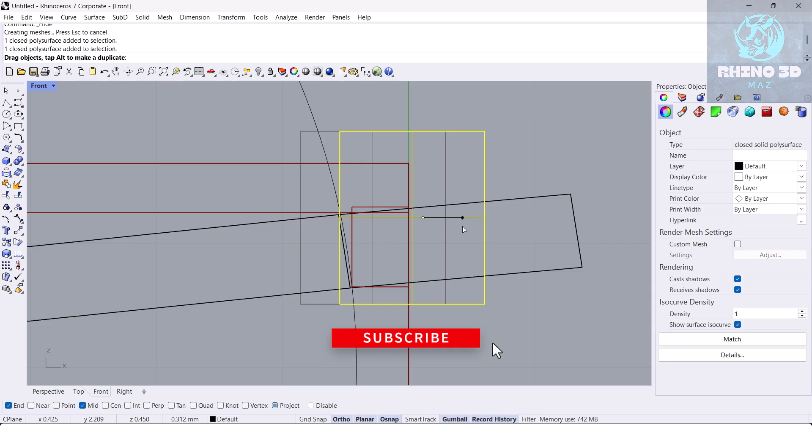So in this video, we are learning how to design a box lock in Rhino in the easiest way possible. The main thing that you should know is the height of the box. It depends on the thickness of the tongue and the thickness of the box. That's the main thing that you should know. The rest is very easy.

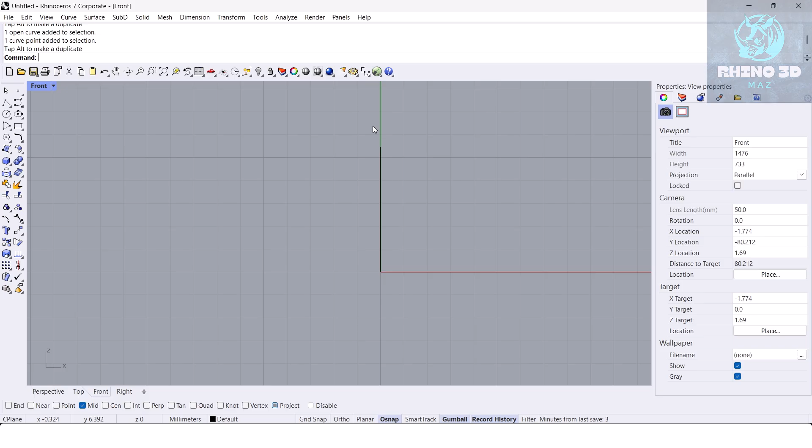So I start with drawing a line from center, it's just a random line. Then I start making a copy, or you can use offset, it doesn't matter. So we need at least 0.4 for the thickness of the box. This is the minimum I'm talking about. Of course, for some designs, you can increase it or decrease it, but I don't advise you to decrease it.

I just advise you to make it thicker. For example, maybe 0.5 or 0.6 mm is much more ideal. And then we have a tongue, which is like this.

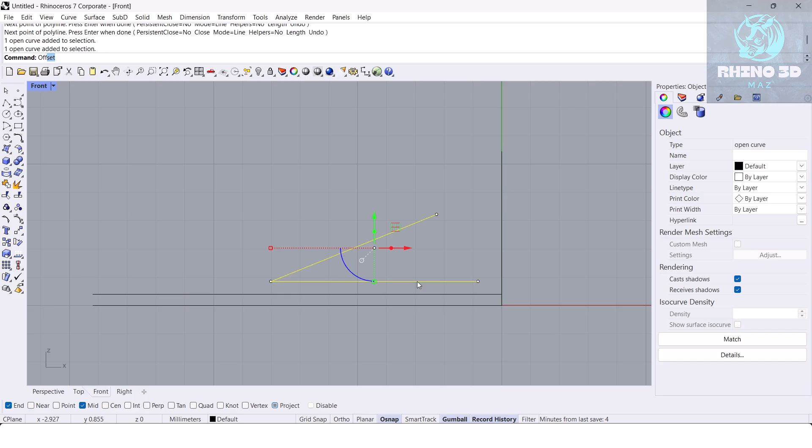And for the bottom and the top, if we offset, for example, 0.6, which in my opinion is the minimum. So we have 0.6 here, 0.6 here, so it means it's totally 1.2. Then another copy with 1.2.

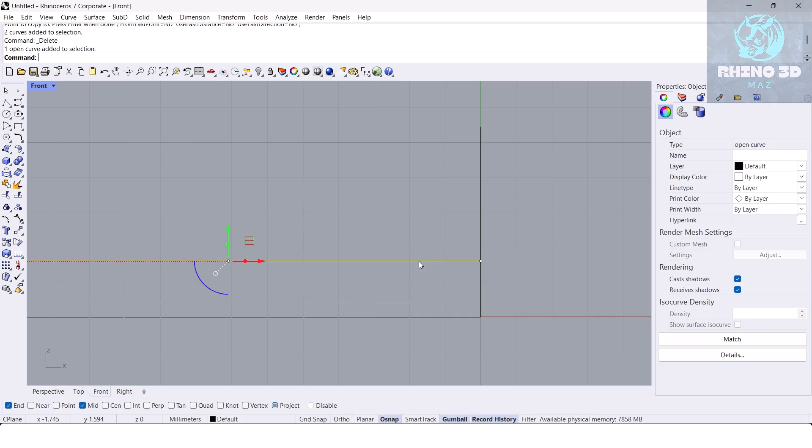Let me remove this curve. And then we have another 0.6, which makes a stop or something, which takes the lock inside to not go out. So we need at least 0.6 for there. So I make another copy with 0.6.

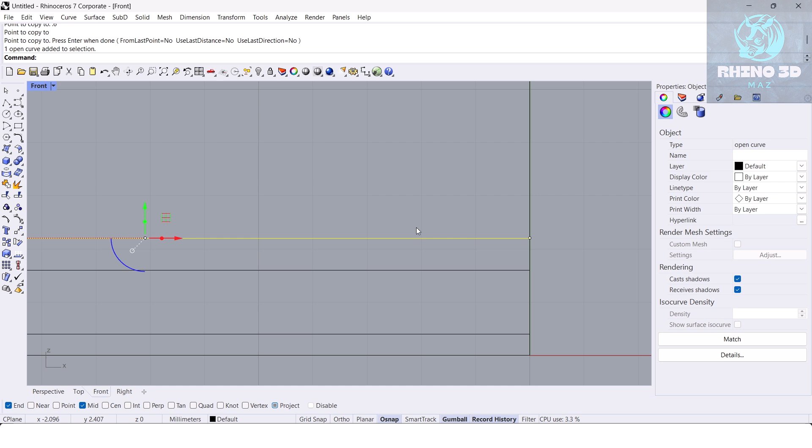And at the end, we have a thickness at the top of the box, so for that part also we'll add 0.4. Then the total height of our box will appear, which is 2.6.

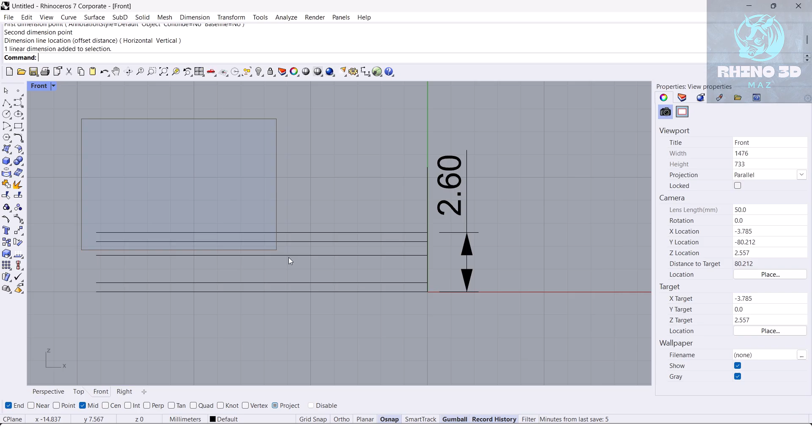We will add some tolerance to it, so I will make it 2.65. So I will draw a line with 2.65. It will be a minimum box, minimum height for our box lock.

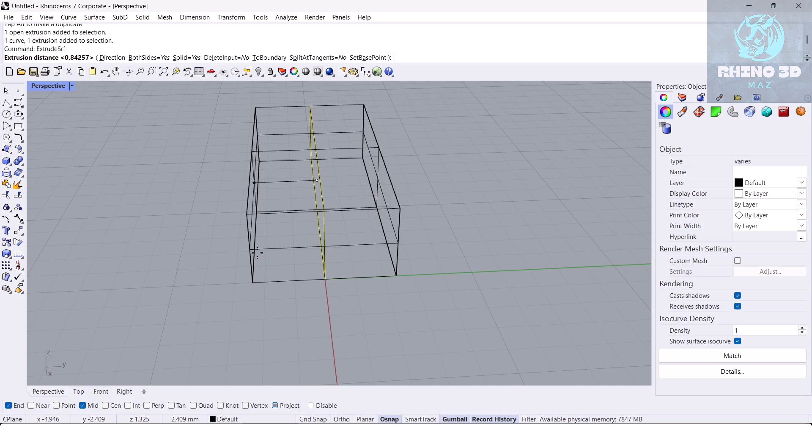Now I'm going to add the width. For the width, you have more flexibility, you can choose whatever you want. In this case, in both sides, I will push 3. It will be totally 6 mm width.

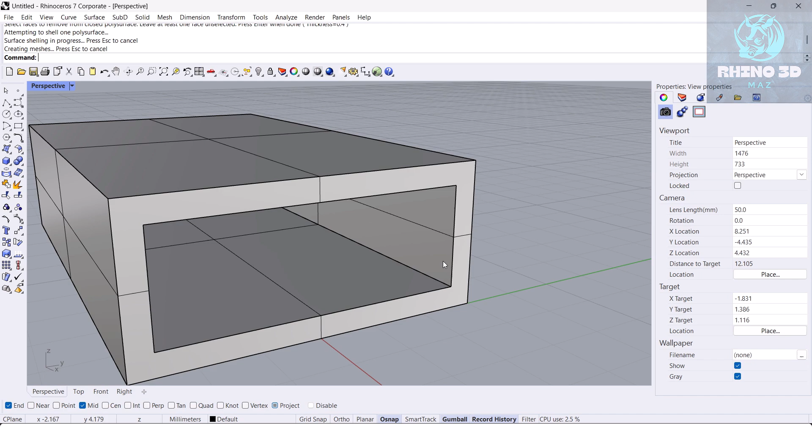Then I'm going to use shell to make it empty inside. Our thickness was 0.4, so now we have a box. In here, we have enough space to add our tongue.

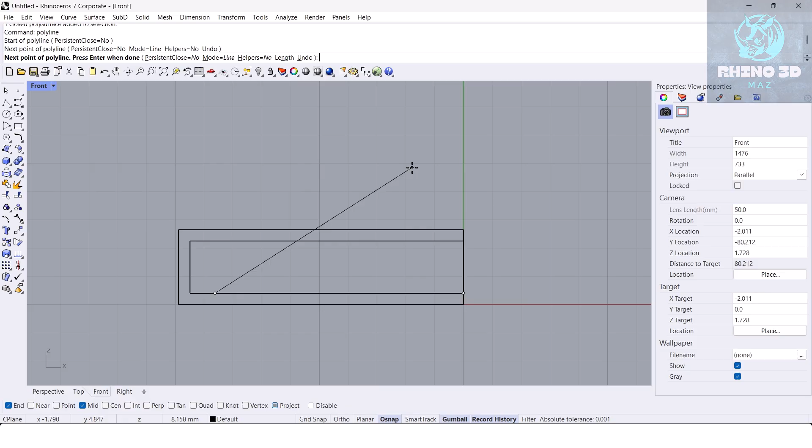Then I'm going to the front. I hide the ISO curves. The project on, I start designing the tongue. I need the end point here, if it will give me, yes, this is our end point. And draw a curve like this.

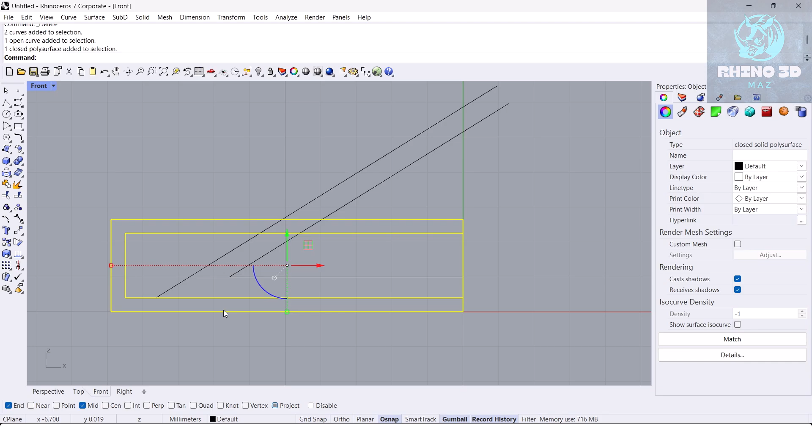For this part, many manufacturers like to make it manually after casting because of the spring effect, and of course, if you do that, it will give you a better result. But sometimes for mass production, we prefer to use the casting parts. Of course, after casting, you will have a better result if you make it by hand on the bench. But anyway, I'm going to show you how to make it.

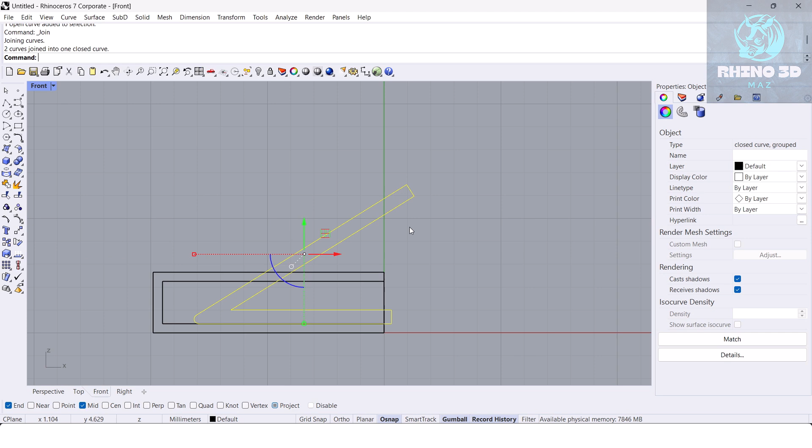Then we have a planar surface here. I just used fillet here.

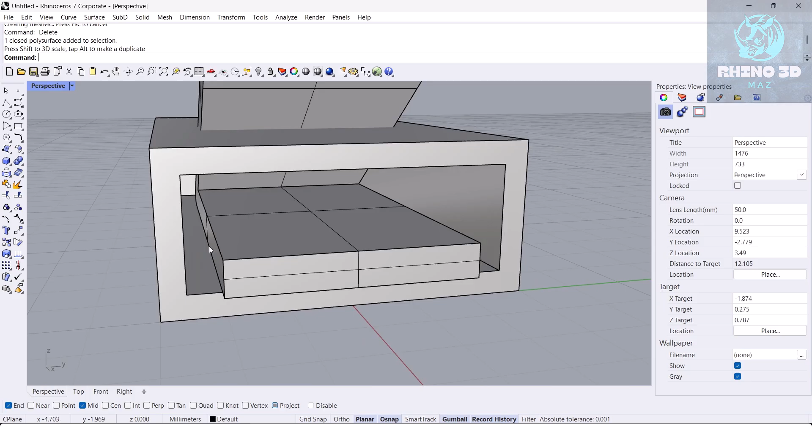Let's make a planar surface. What's the perspective? We need it with the same width of the box. You can decrease it, no problem, if you want to save some weight or do something else for whatever reason. If you want to make it smaller, the only thing you have to do is close the gap, and you will be fine. But in this case, we are going to keep it as the width of the box.

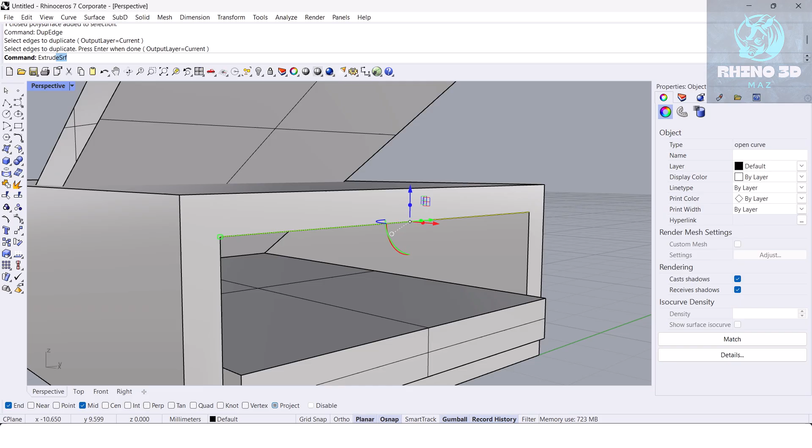Now we have to make a duplicate edge here, extrude this piece to the bottom, make the stop or the break, just make some overlaps and add thickness. The minimum will be 0.4, 0.5. I used 0.45. Let me add some colors to it.

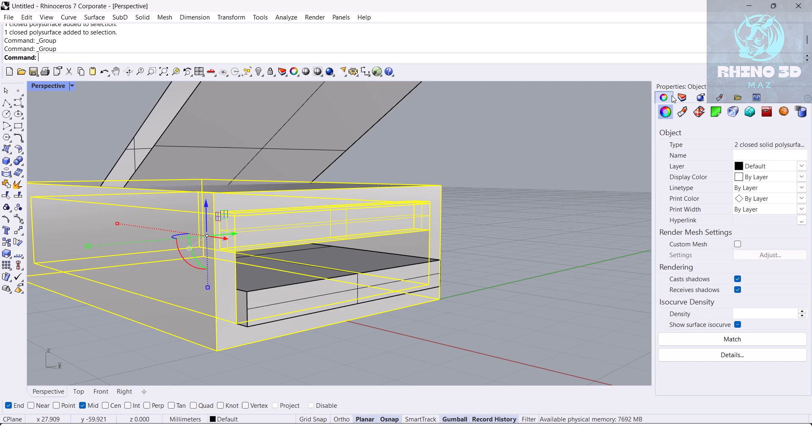Change the color, this is our box. Let me make it a little bit darker. Now I feel much better. I just hide the ISO curves so we don't see something wrong.

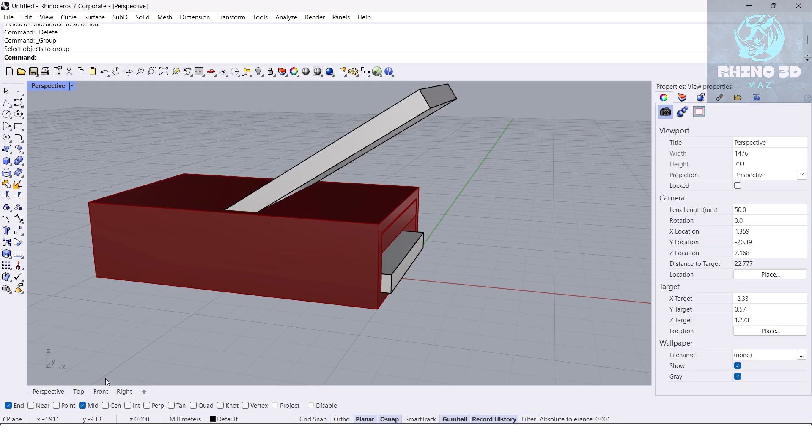The second thing that we need is to understand how much we have to cut through here. For example, I'll show you, I draw a both side line with the minimum 0.45, which gives us about 1 mm. If you go below these numbers, your lock will become broken and it will break easily.

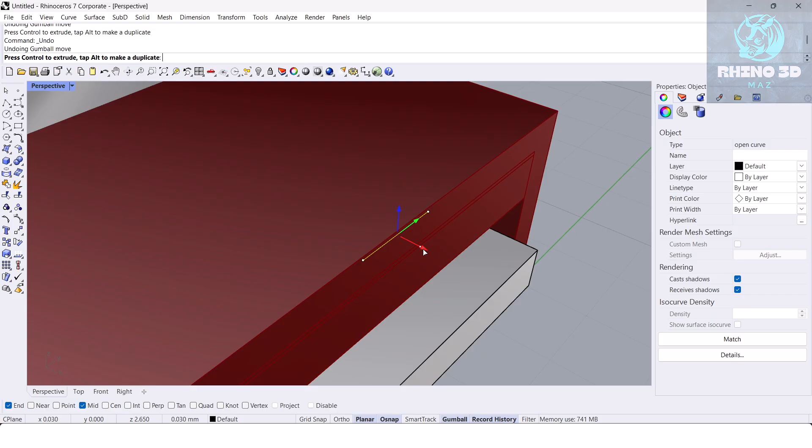Especially if you are using, for example, 18K or 21K golds. But if you use 14K or silver or whatever, it will be much stronger. But my numbers are the minimum, maybe you can go below those numbers, maybe you can go higher. It depends on you.

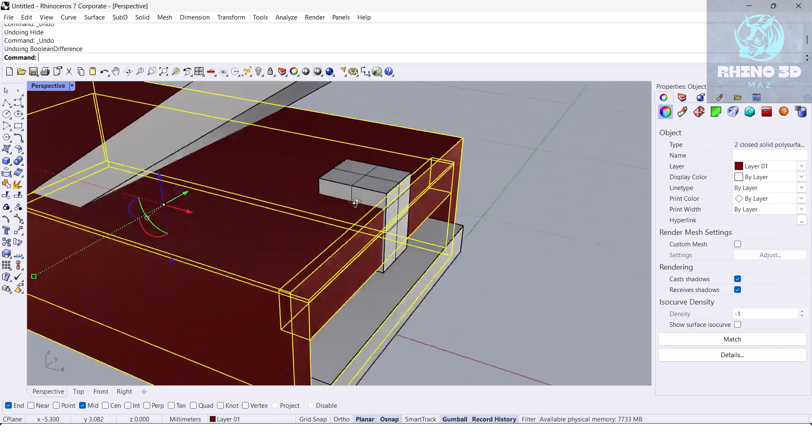You have to do some tests if you want to do that. Now we have to understand how we should open this part, with a Boolean difference - how much we need to go through, it's about the depth of the Boolean which we are doing here.

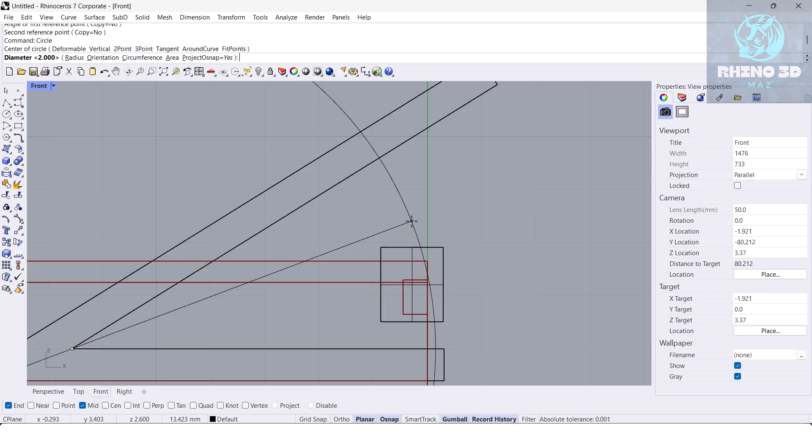To find that part, we're going in here. Here is the center of this one on the bottom. I add a circle and put it here. Let's check - our lock should become here and stay behind this part. The part which I'm talking about is this part.

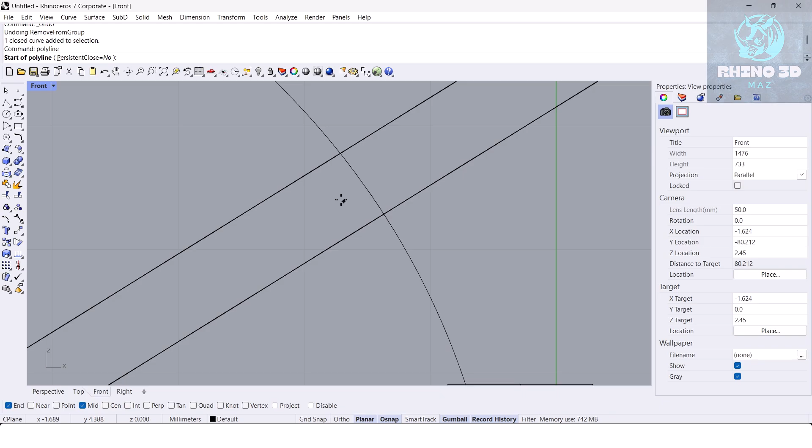So after drawing this circle, the last thing I should do is just cut this part. You can use Boolean, also you can use trim, it depends on you. If you use a split or trim, just do the cap. Now I just hit the cap. Yes, it's closed.

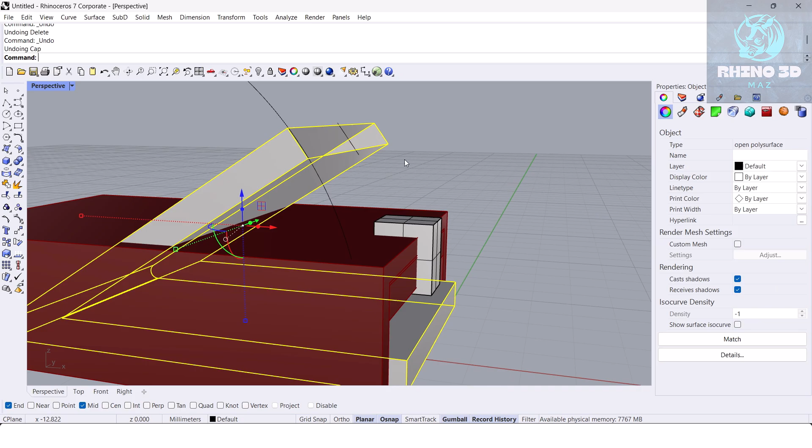So now I'm going to do the Boolean difference. Oh, no, no, it was wrong. I don't have to do the Boolean difference now. Just give me a moment.

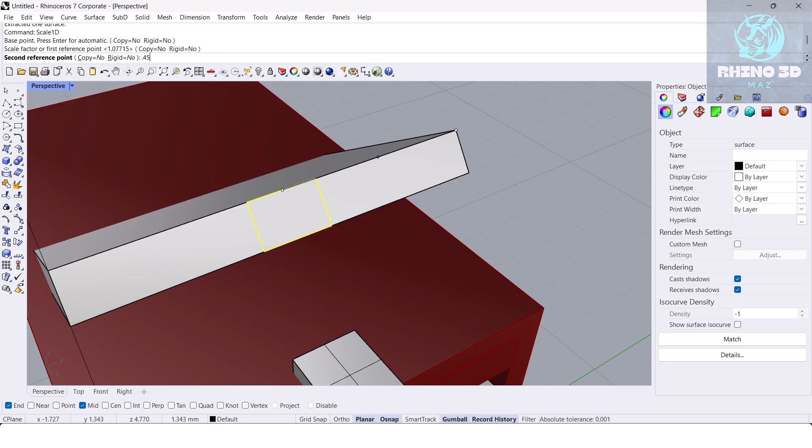Now I'm going to do the extract surface. I scale this one in both sides, 0.45, which is our minimum. Then I'm going to change the gumball to the object and extrude it.

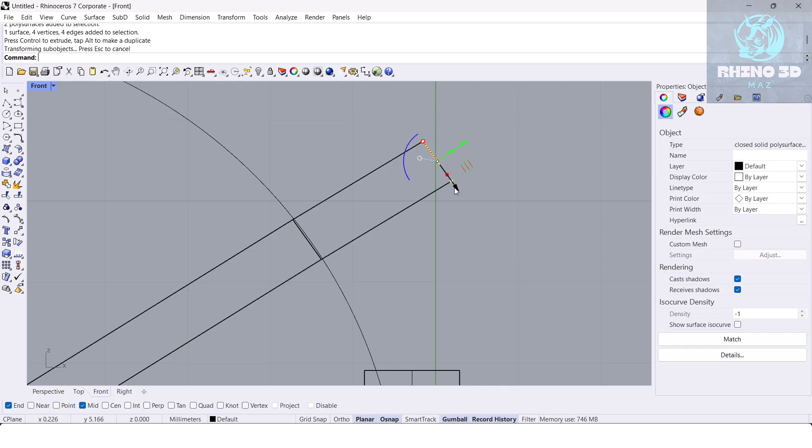We will cut this one as well. We will use rotate. Let's relocate it a little bit straight. Yeah, it's fine. Use the rotate command. Project is on. We'll snap here. Copy on yes, and then come down.

Your main object will stay at this point and just put it in the hide - Control H, you can do it. Now you can see our lock is closed.

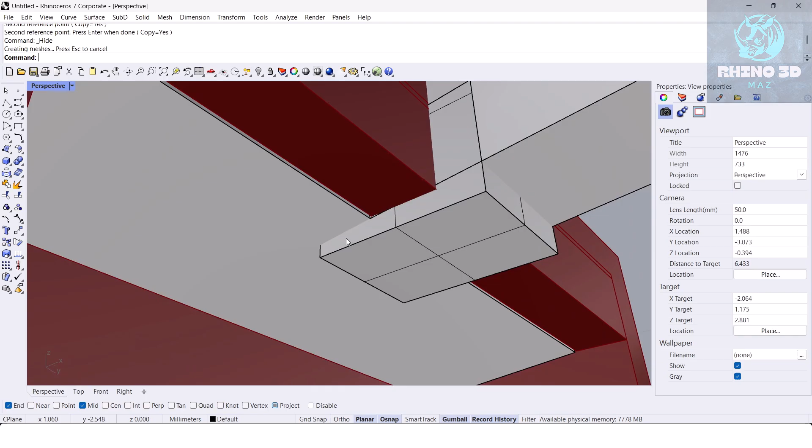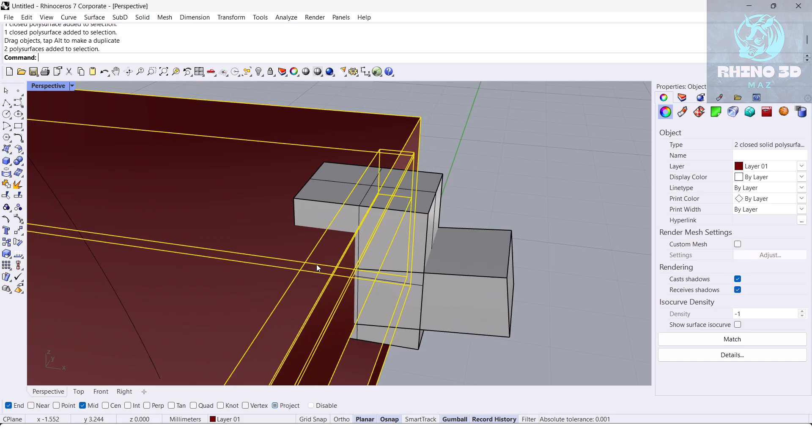How much we should cut? Cut this much, need some depth here. Boolean difference.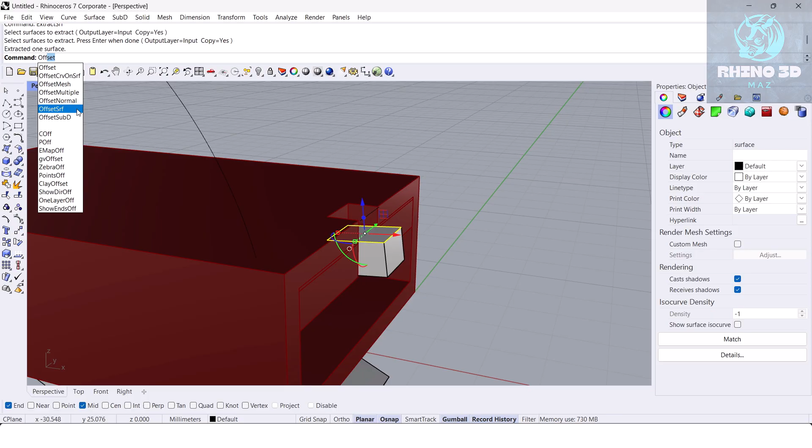Then I need here at least 1 mm. Then extract surface, offset surface, 1 mm, and then another extract surface.

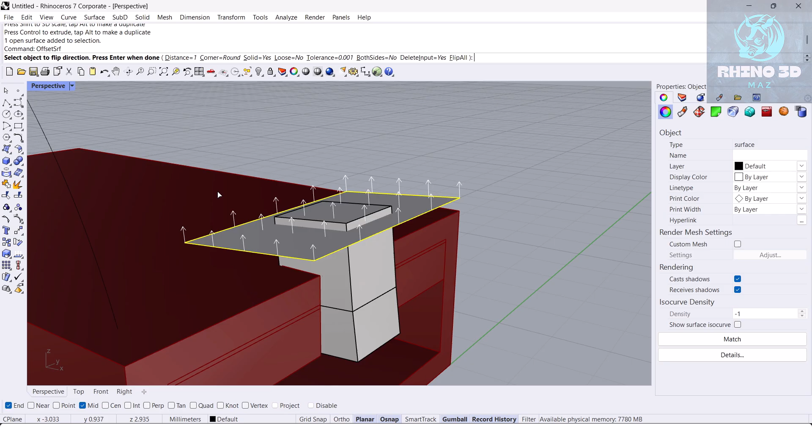This is the button which is doing the release job for us. Offset surface, at least 1 mm is recommended. Fillet edge - this is not necessary, but if you add this fillet edge, it will help you. Shape.

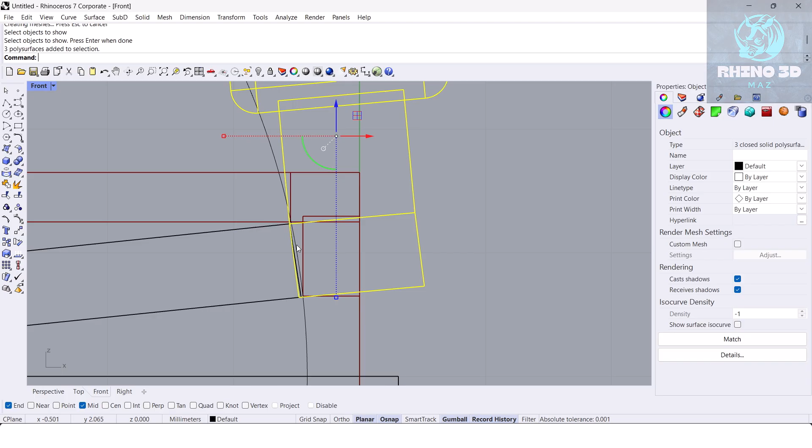Now we are going to bring it back. Go to the front view. Use the rotate, copy is on - no. Snap it here and then put it on the main part. And then we're going to delete this one. Remove this part and your tongue also is ready.

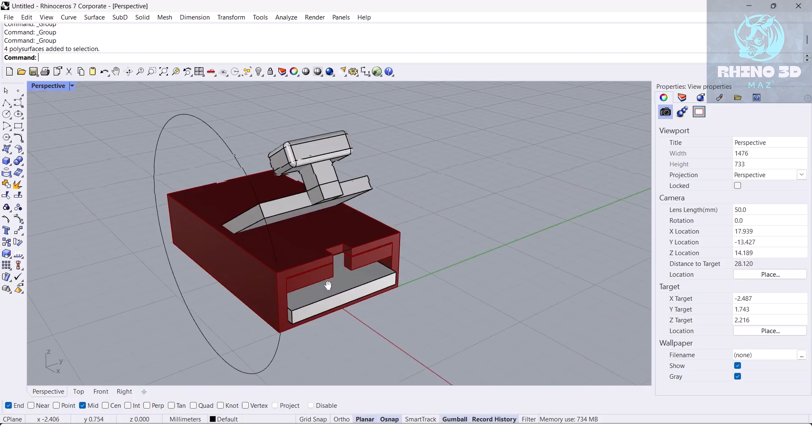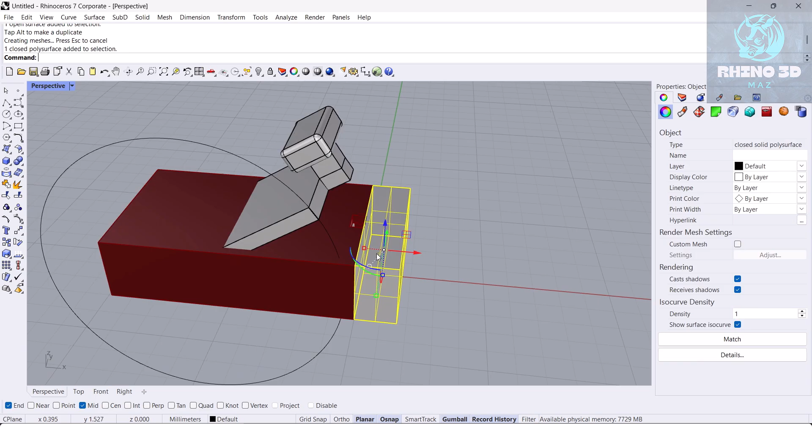The last thing that we have to do is just make a box for our tongue to connect. For the thickness of this part, you need at least 1.5 to 2 mm. But if you want to add stone on it, you have to make it bigger. Let me see how much it is - it's 1.6, let's scale it to the 2 mm.

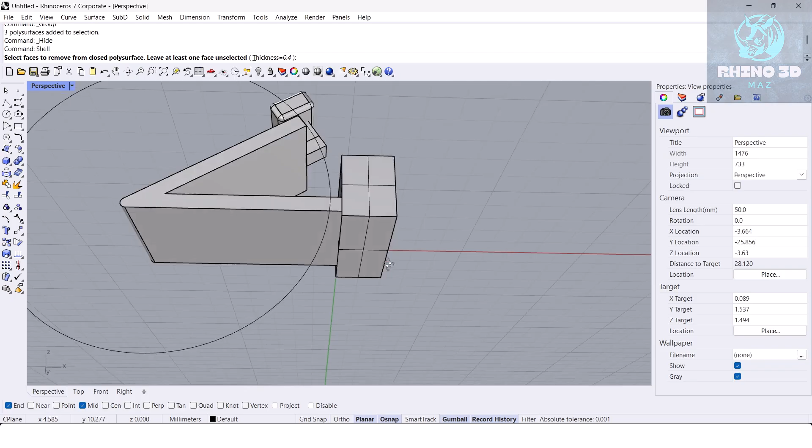I use a scale 1D, 2 mm. I will hide this box using shell 0.4. I prefer to do it this way to decrease the weight. These days, the weights are very important, especially in gold.

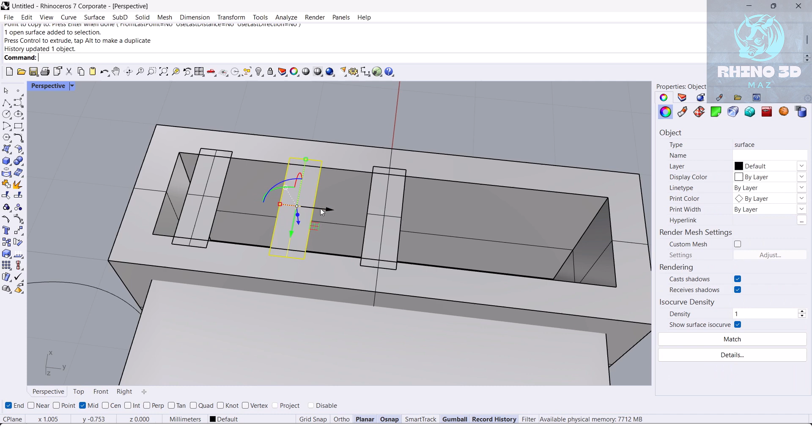I scale this part to 0.2, make a copy, decrease it, offset all of them with 0.4.

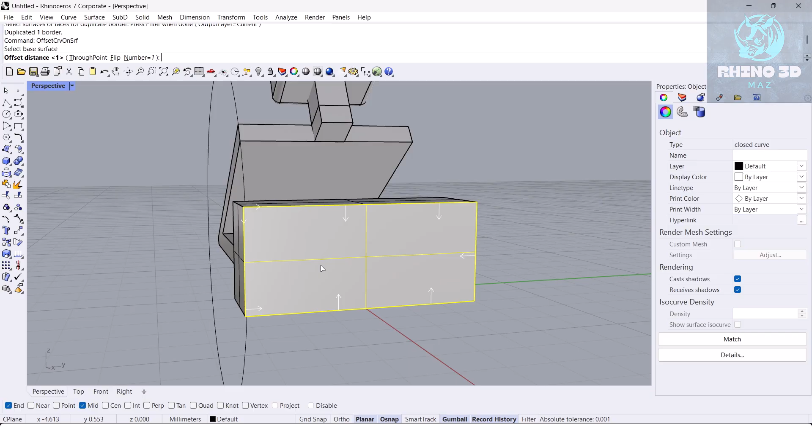You have a chain connection here. Also, you can use offset curve on surface, for example, with 0.5 or whatever you want. It depends on you for this part, because it depends on which type of chain you want to connect it to. And we have it in the minimum weight possible.

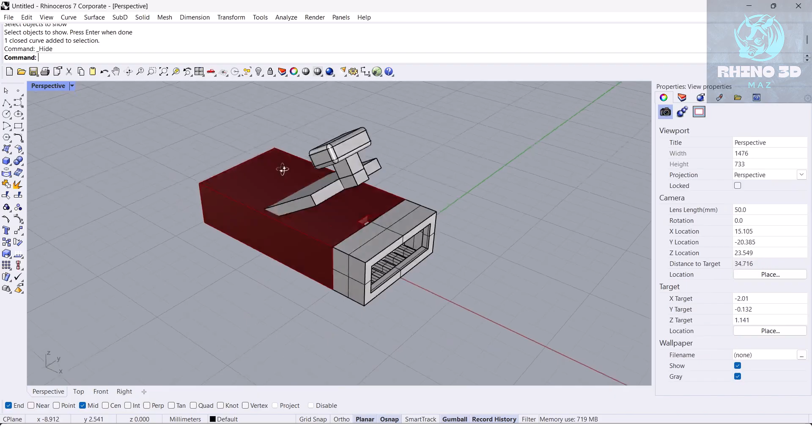The next thing that we are going to do is something to support the lock to keep it safe. We will print it like this with a 3D printer. After casting, it will have some spring effect. It will push and the lock will work.

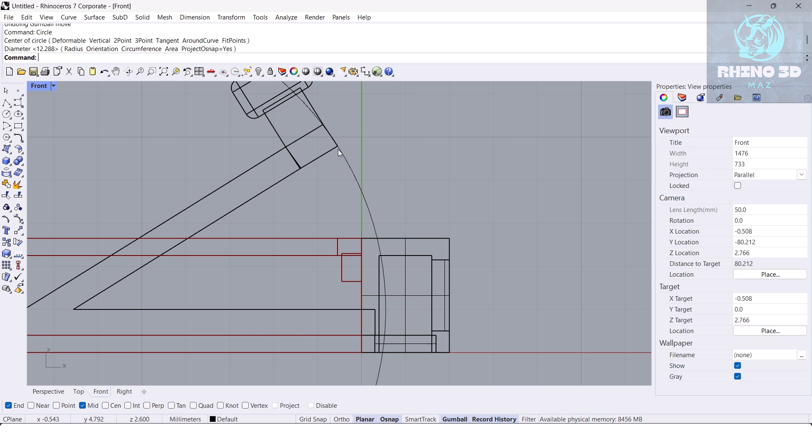Before going for that support part, you need to understand the back of this part when it comes down. Let me show you. Rotate, project is on, copy is yes. When it comes down to here, when they are touching each other, the top part touches the bottom part, you have some problems here.

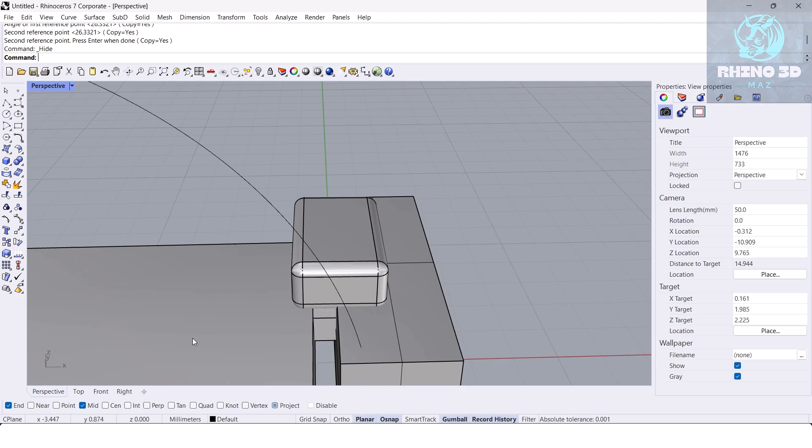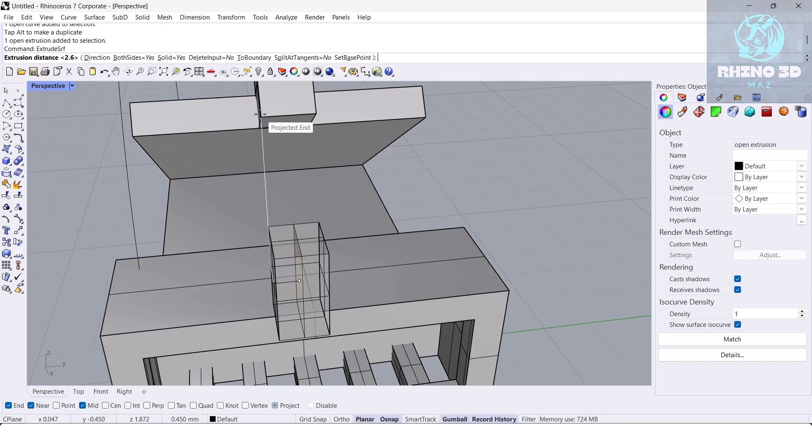You have to make another Boolean here. To make that Boolean, we need a curve. Go a little bit further, go through that circle to make sure you don't need to do some work on bench. Then we have a surface. Then we extrude the surface. Then the Boolean.

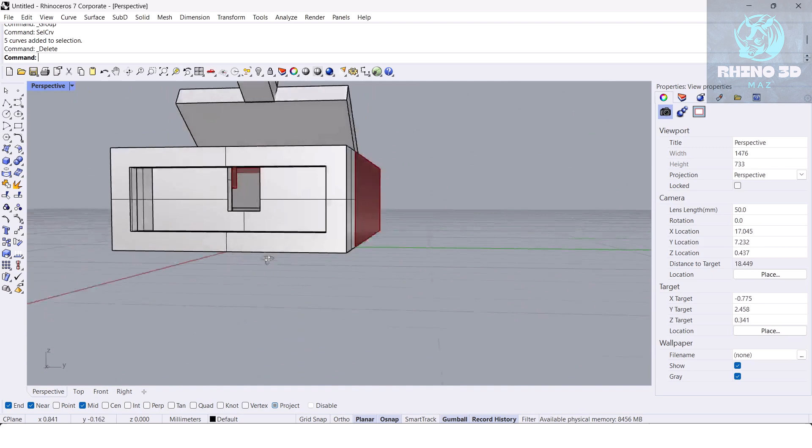Going to make it open. Now our lock is totally ready. Forgot to put them in the same group. Select curve and delete - our lock now works properly, it will work very well. But for the last part, I'm going to add something here.

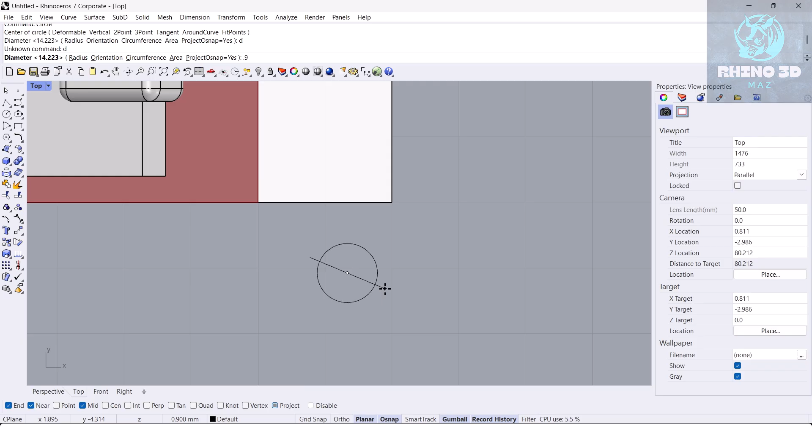With a wire, you have to make some mechanism to keep it safe. For that wire, which 100% must be made on the bench, the thickness will be about 0.6, 0.5, maximum 0.9 on big locks. In this case, I'm using 0.9, and it's not possible to cast it. It's possible, but during printing it will break because it's a thin wire. Even if it doesn't break after printing, during casting it will lose the shape. So it's better to make that part on the bench.

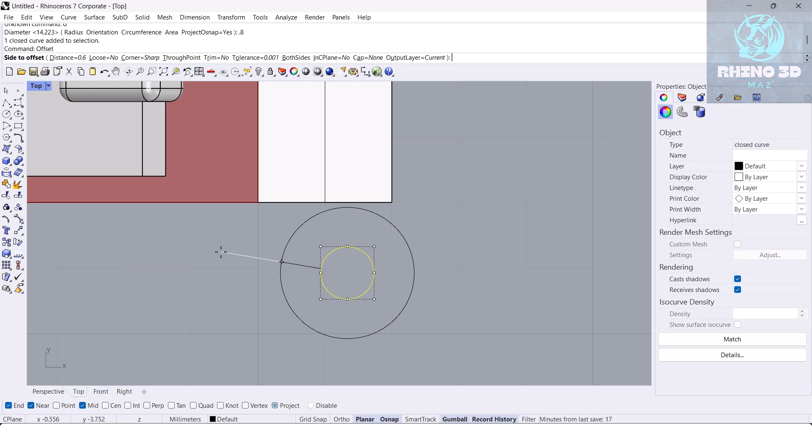But we have to make the hinge and the grip for it on Rhino, the software. Then we will add 0.445 thickness. We have another planar surface here.

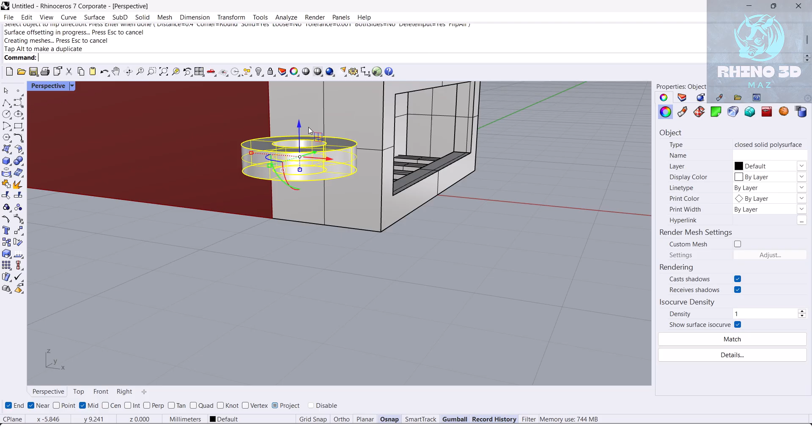Connected to this part, I remove the curves, offset at least - I had to do it on both sides, at least 0.4 both sides, which means 0.8 totally. Go to the right view, you can use align and put it in the center. If you want, you can decrease it.

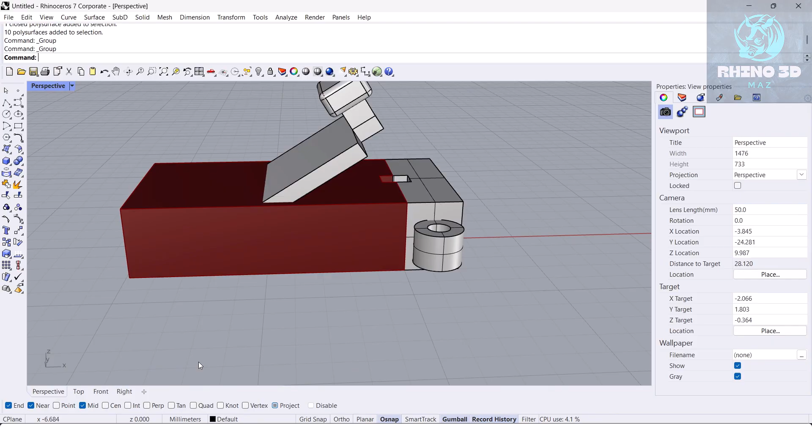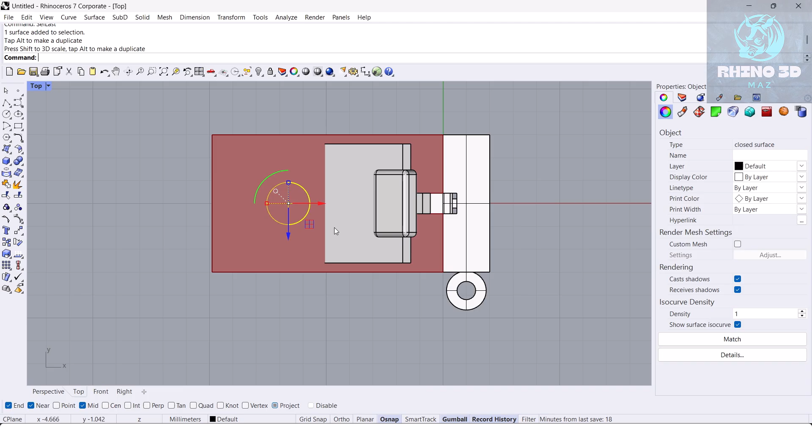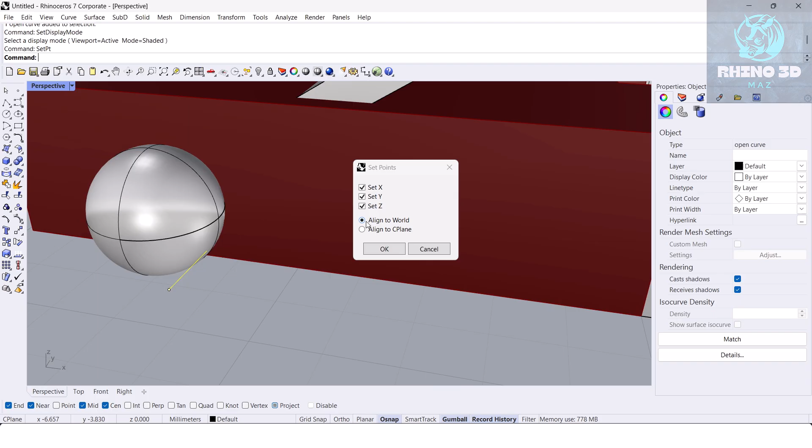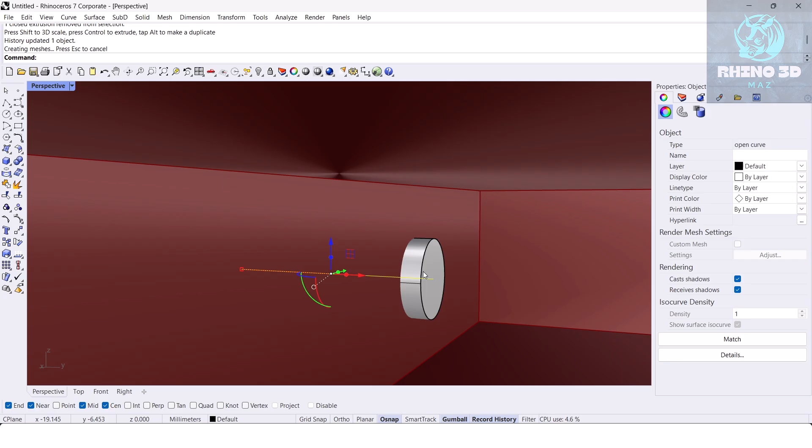Then from the center, we'll draw a line to go through the set point. This one project was on, that's why it's on the C plane. Turn off the project, set it on the midpoint, use the pipe. 0.8 is fine. Just make sure the other end of your pipe is not inside the box. Let me show you how it will happen - you have it like this, it will come inside and affect the lock mechanism. Then it will be one piece.

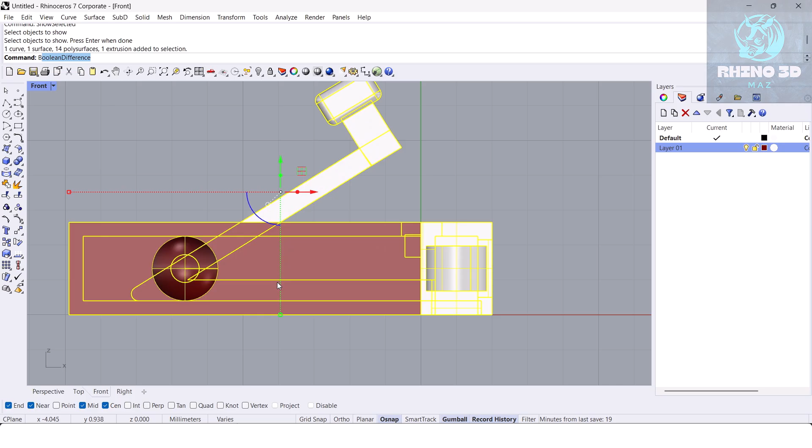And our lock is ready. If you want to bend it or put it on the bangle or somewhere else, the only thing you need to know is select the whole design, use the bend command, turn on the project, and then bend it. It will work properly. The only thing you need to know is maybe just changing the shape of the sphere.

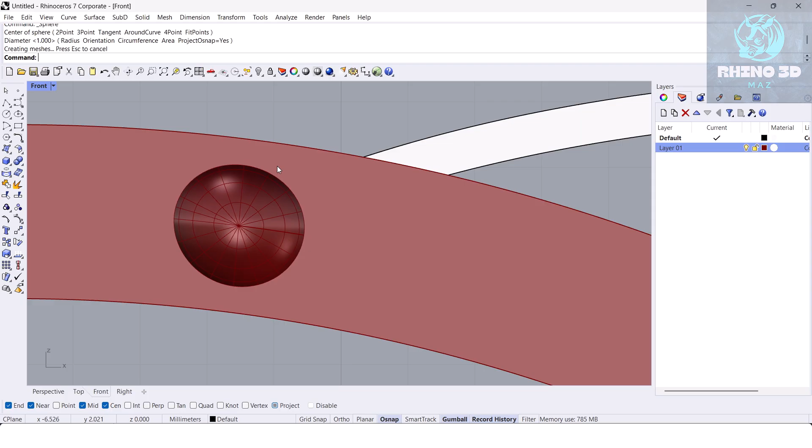Just you need to draw it again. Just draw another sphere, put it here, and remove the old one. Also for this part, we have to do the same thing.

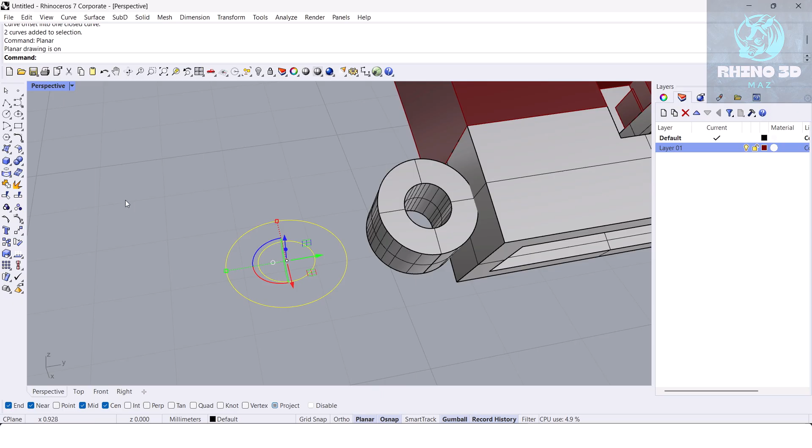We'll draw another circle, 80, offset, planar surface, and offset surface with both sides 0.45. We'll remove this one and rotate and put it here.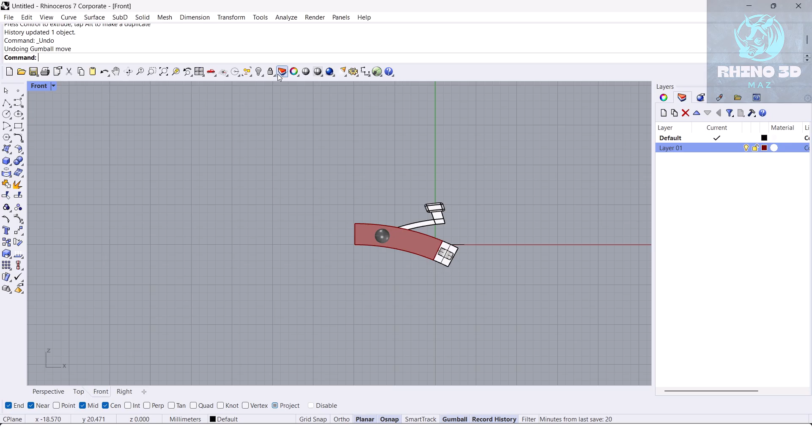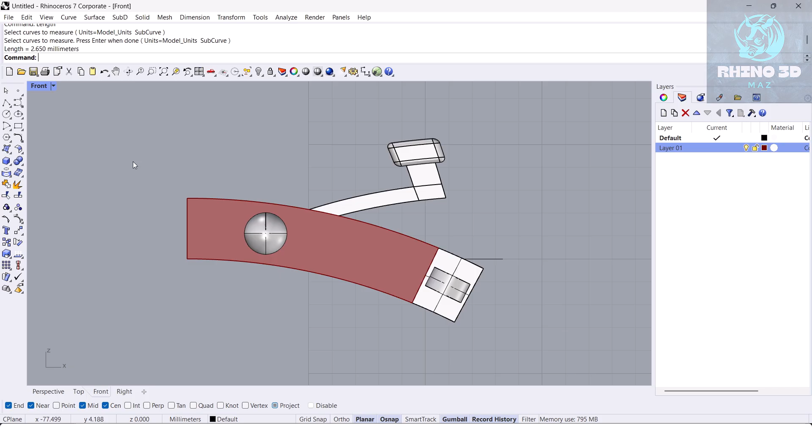Sometimes you want to do the same thing on a bangle, for example. This is our bangle size, this is the inside, and on top of this ellipse will be our bangle. The only thing you need to know is, for example, here we used 2.65, which is our minimum lock. So we'll do an offset with 2.65.

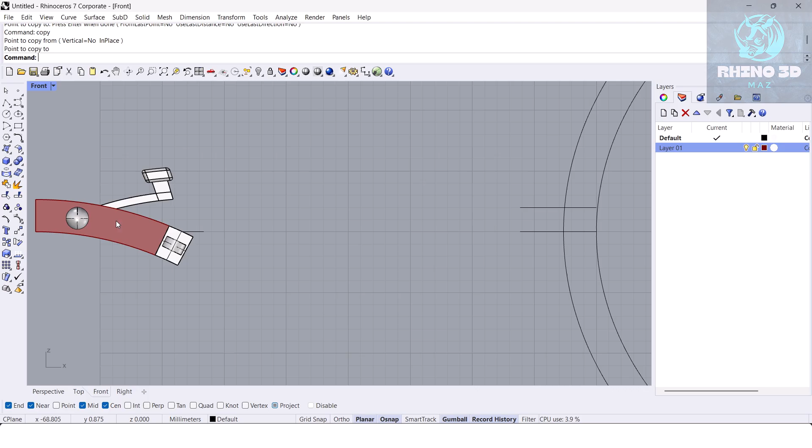Then we have this size, which is 2mm. You can change it, no problem, but just draw a line here, make a copy with 2mm. You can change it, I'm just trying to show how we can fit this lock here. And then we have 11mm, or maybe 10, we can say. Then we have a circle from center.

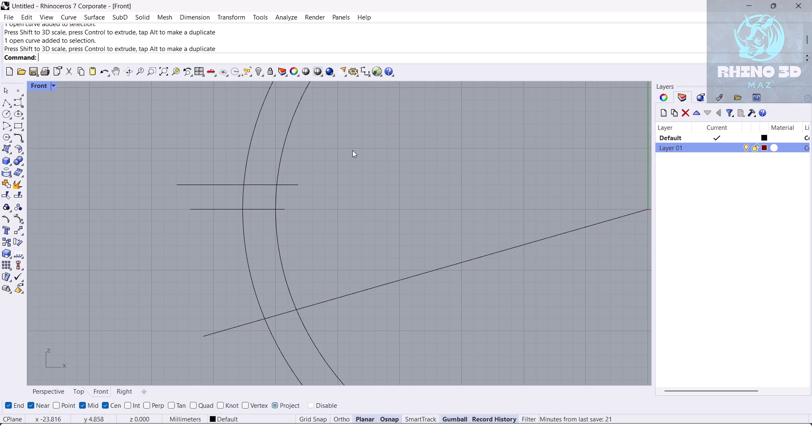Touch this part. The only thing you have to do is just make a copy, Control C, of the main ellipse. Then use these curves to trim the rest of the curves. Use Control V to return the main ring, and you can lock it or put it in a different layer.

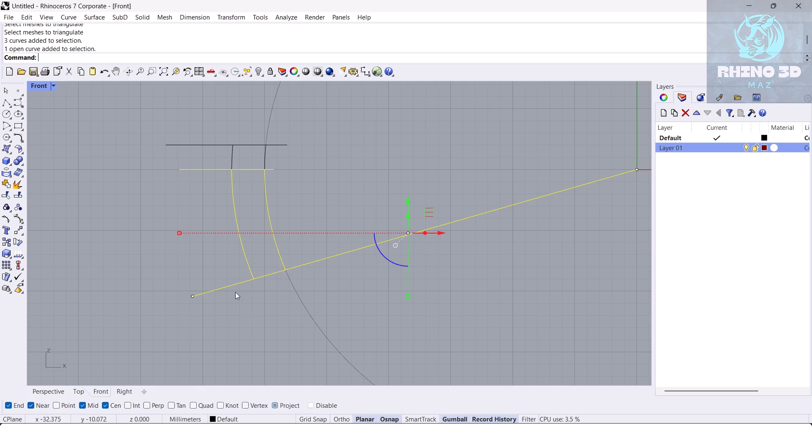Then split this one. Now we have the box part. Join them, and then we will have the deal box, the long box, and we will join them as well. We'll use the planar surface.

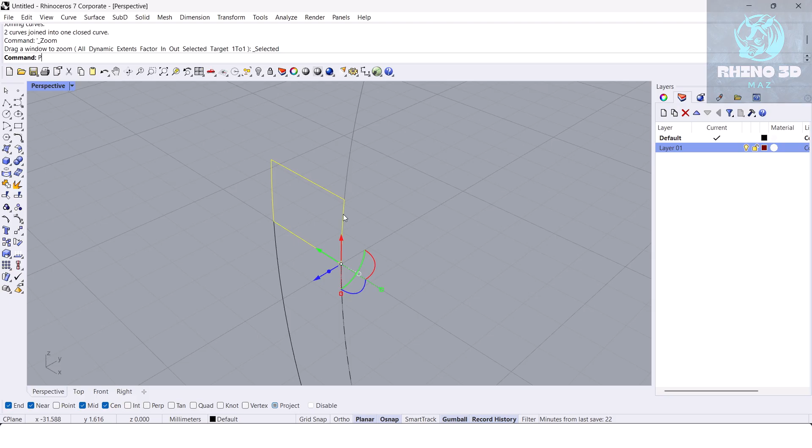Yeah, my Rhino is on planar drawing. Then we can extrude it or offset on both sides, it depends on you. I use both sides 3.

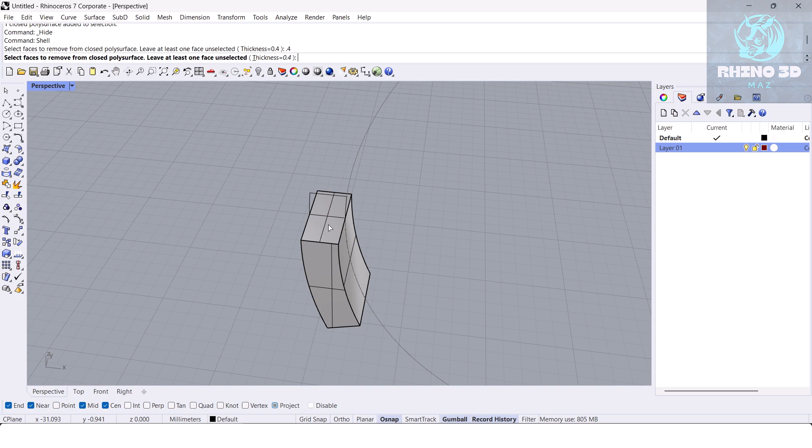Now you can start the process again. Shell with 40 or 0.4. Go to the front, hide the ISO curves. Go unghosted or wireframe, it depends on you.

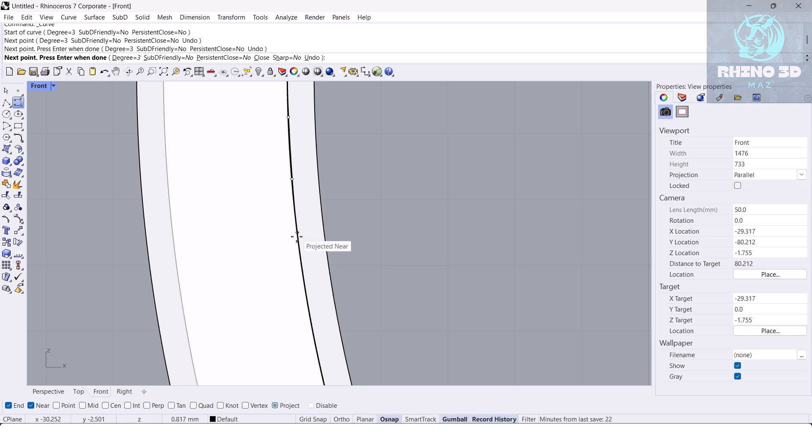Sorry, I have to snap it here on the end point, and turn on the near. Project is on also. Have our tongue curve, we'll just move it a little bit higher. That 0.5 tolerance which you add is because of these problems.

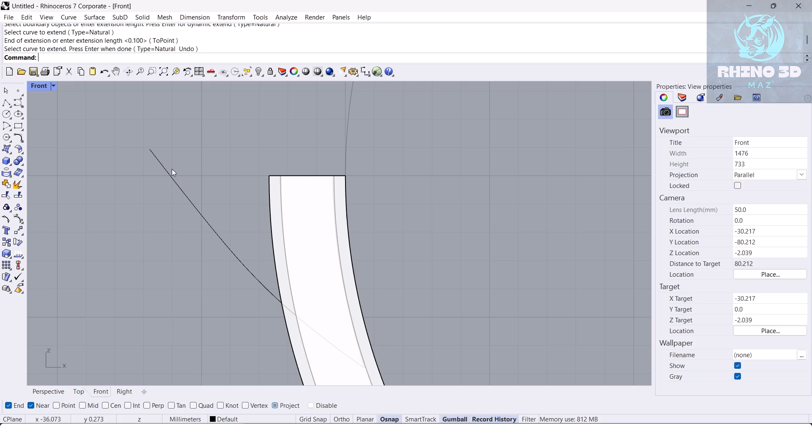Make a copy of it. Extend it - doesn't matter how you extend, and it doesn't matter how much you extend, because if you remember, we just cut the last part. Now just join them, use the offset 0.6. And the rest goes on exactly like the first one which we made.

As you see, making a box lock is a very easy job to do. I think it will take 10 to 15 minutes. I don't know the exact time, but you can make it easily.